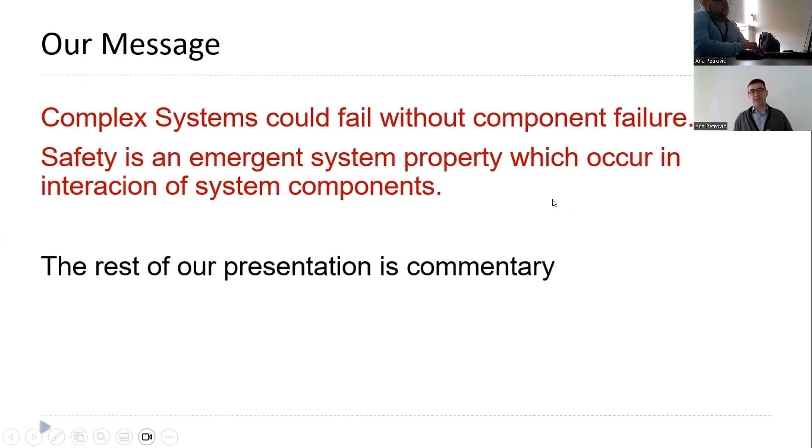So the outline of the commentary is: a few words about complex systems, then systems thinking and systems theory, risk and safety - those are different concepts - STAMP and STPA, this is methodology I will talk about, a few case studies, and epilogue.

In addition to a message, we also have a motto, which has been a leading sign in the last few years. It's actually words of our Professor Nancy Leveson from MIT. She said the first step in solving any problem is to understand it. We often propose solutions to problems that we do not understand, and then we are surprised when the solutions fail to have the anticipated effect.

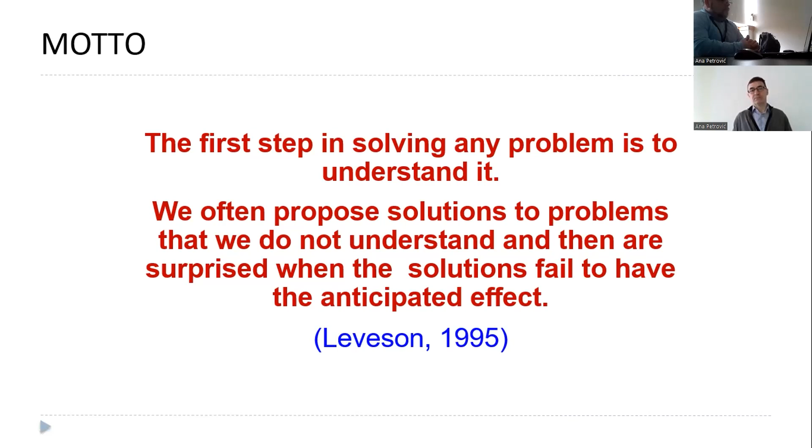We came from hydraulic engineering area, so this presentation is primarily related to that, but anyway, it should be applicable to any kind of complex systems.

We are focused on water systems, complex hydraulic engineering systems. Those systems are extremely complex. We have catchments, surface water reservoirs, many gravity mains, river channels, water treatment plants, distribution networks, etc. It's really complex. In addition to that, usually these systems are bureaucratically divided into water resource engineering and communal services. But the system is one.

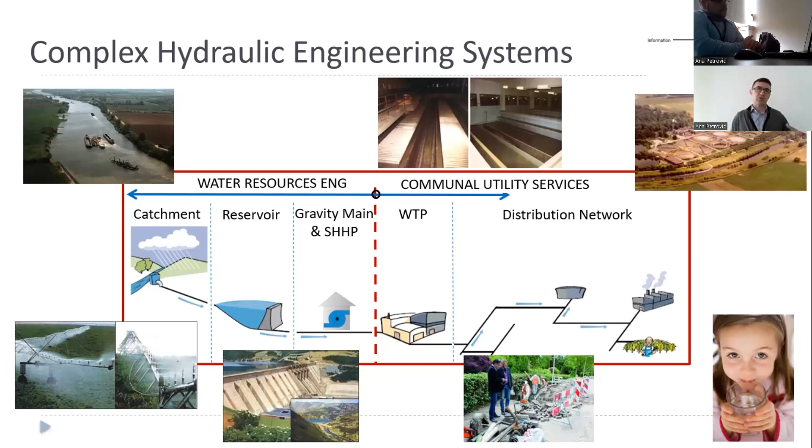Yes, and when we are trying to find the component failure, we will chase our tail. So many component failures could occur, so how can we approach that kind of complex system?

Possible approaches, for example, traditional analysis, which is based on decomposition or analytical reduction. We just split the system into parts, into components, and in that context, behavior of the components is the same, whether analyzed separately or with their role in the system in totality.

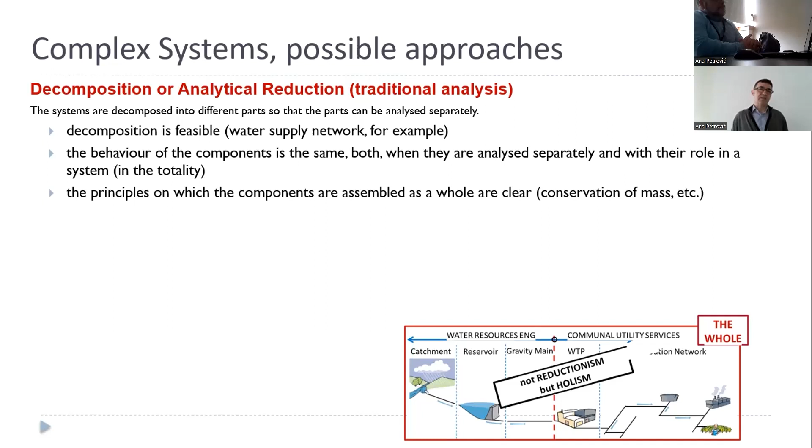This is traditional kind of analysis. Other approaches have basic ideas of systems thinking and systems theory. The analysis starts with the system as a whole, not with the parts.

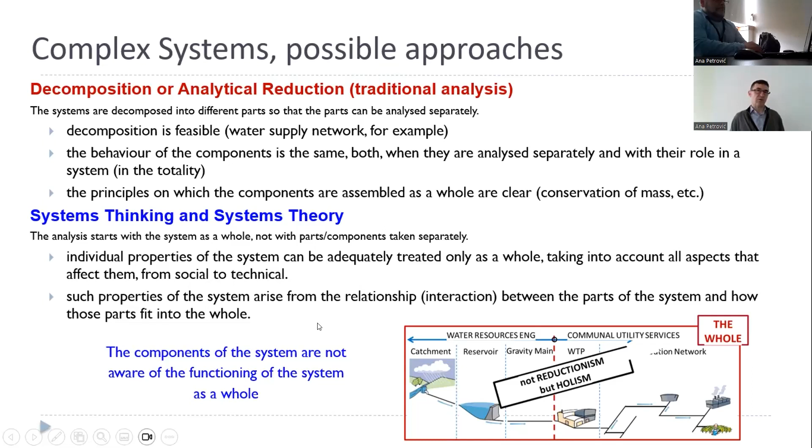Related to the previous approach, individual properties of a system can be adequately treated only as a whole, taking into account all aspects of them, from social to technical, because plenty of layers are in that kind of complex system. Such properties of the system arise from the relationships between the parts of the system and how those parts fit into the whole. So the components of the system are not aware of functioning the system as a whole.

A few words about systems thinking and system theory: water resources management systems are systems of organized complexity. They are open type, hierarchical, social, technical, require control to be adaptive, safe, and resilient.

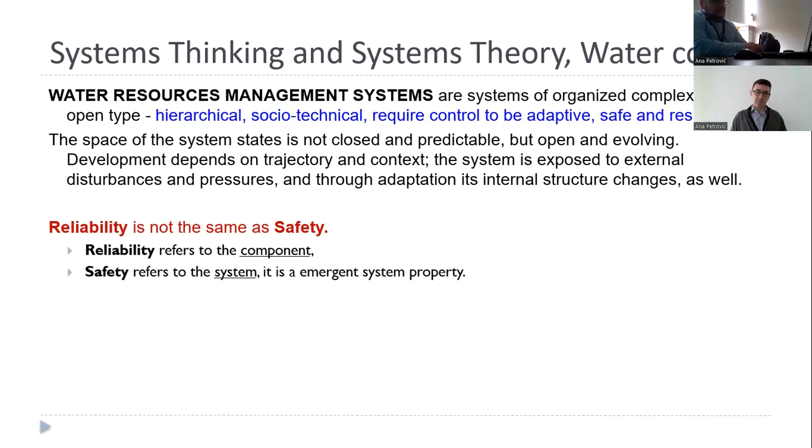It should be noted that reliability is not the same as safety. Reliability refers to the components, and safety refers to the system. Safety is the emergent system property, which is formed in the interaction of system components.

So when it comes to risk, this is a different concept. The probability is not an appropriate measure for systems of organized complexity, which water systems are, because it does not take into account several very substantial elements: errors in design, social and organizational factors, adaptation of the system over time.

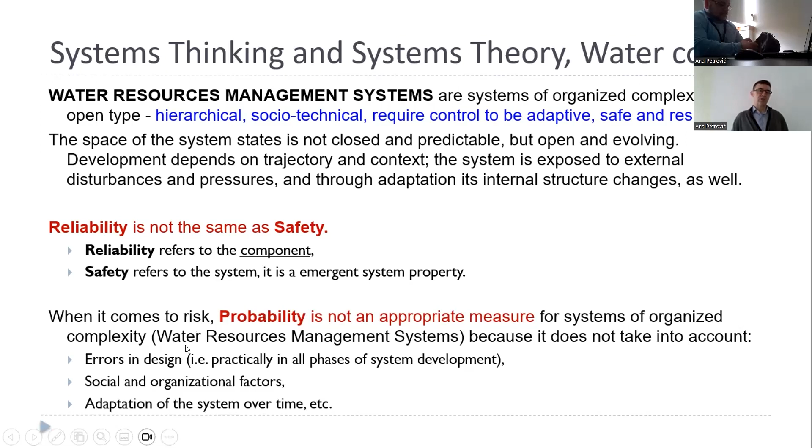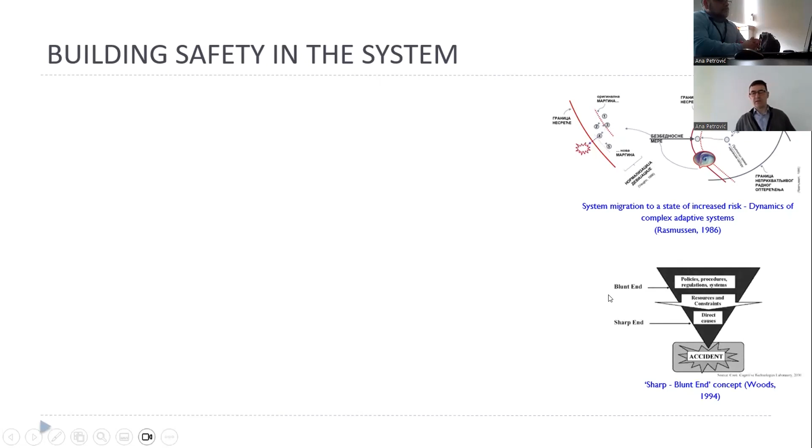So I will not elaborate on these basic approaches, but just mention Professor Rasmussen's concept of system migration to the state of increased risk for complex adaptive systems, and Professor Woods' concept of sharp end, blunt end, and just want to underline that we need to address safety as early as possible in system development through all life cycle phases.

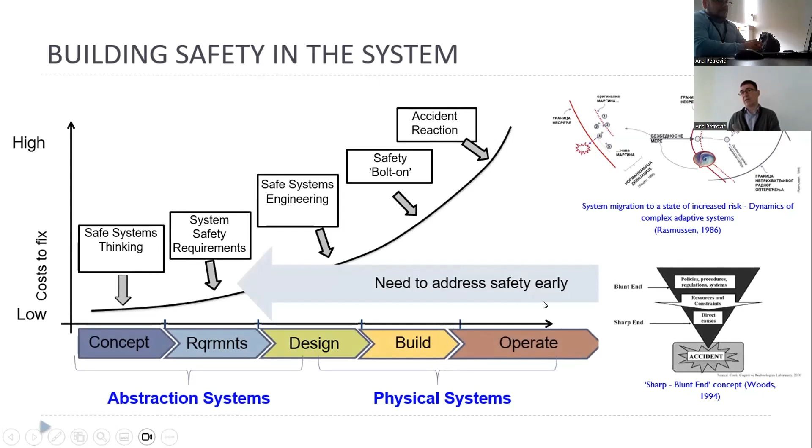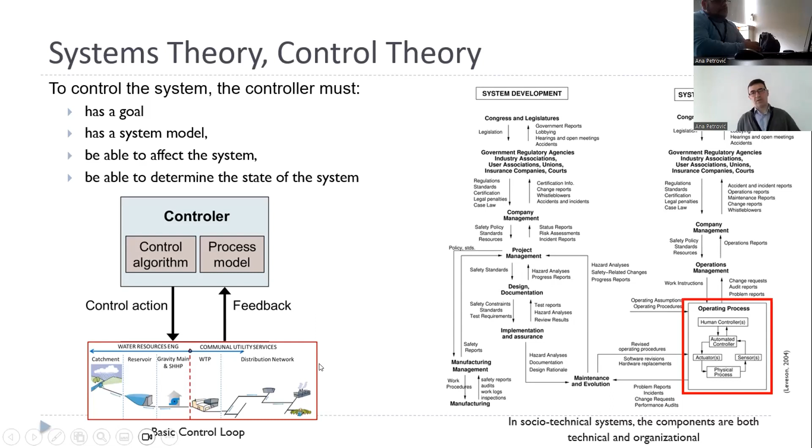All previous is the basis for the methodology of Professor Leveson. Actually, one is a concept and the other is a technique. System Theoretic Accident Model and Processes is based on the concept of systems theory, control theory, and elements of cognitive engineering. The basic concept of the method and approach is constraints, control loops, and process models, and also levels of control.

You could see that in previous slides. I will not elaborate that in detail.

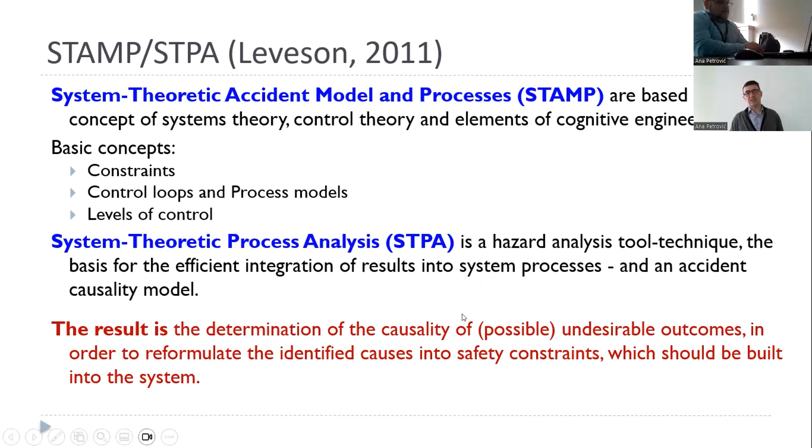And the technique which is based on this approach is System Theoretic Process Analysis, which is a hazard analysis tool and technique, basis for the efficient integration of results into system processes. Actually, it is an accident causality model. What are the results of this approach and technique? The result is determination of causality of causes of possible undesirable outcomes, in order to reformulate those identified causes into safety constraints, which should be imposed on system behavior.

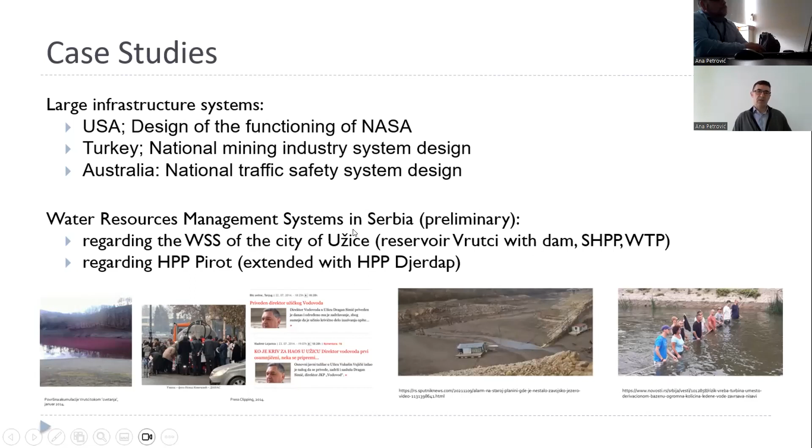A few case studies, just to show that this methodology is applied in the functioning of NASA. In Turkey, for example, when speaking about infrastructure, it is applied in national mining industry system design. In Australia, it is implemented in national traffic system safety design. But in our research, we apply that methodology in a preliminary way on the water supply system of Užice, reservoir Vrutci with dam, small hydropower plant and water treatment plant, and on hydropower plant Pirot, extended with hydropower plant Đerdap. In the next two slides, I will give some details of these two case studies.

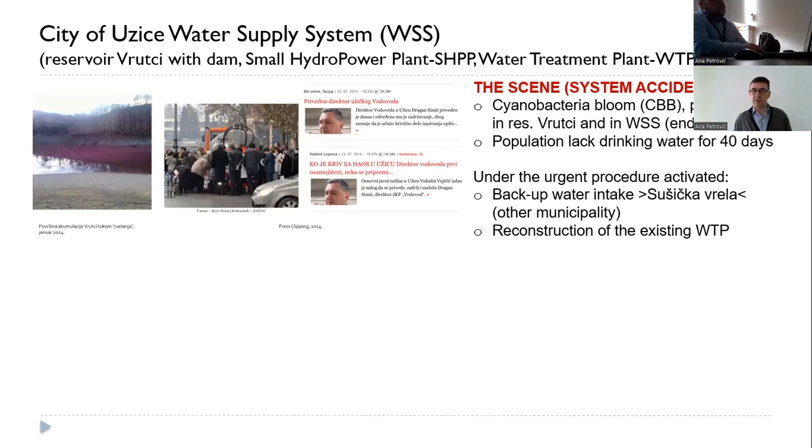City of Užice, what was the scene? About 10 years ago, the system experienced a cyanobacterial bloom, a potentially toxic bloom in the reservoir of Vrutci at the end of 2013, and the population of Užice lacked drinking water for more than 40 days. So this is a very complex system.

So a few causes are: different definitions of water source in different water regulations, and no appropriate monitoring was established at all. This is a huge result which has to be corrected by changing the law. So this is one of the causes of the accident.

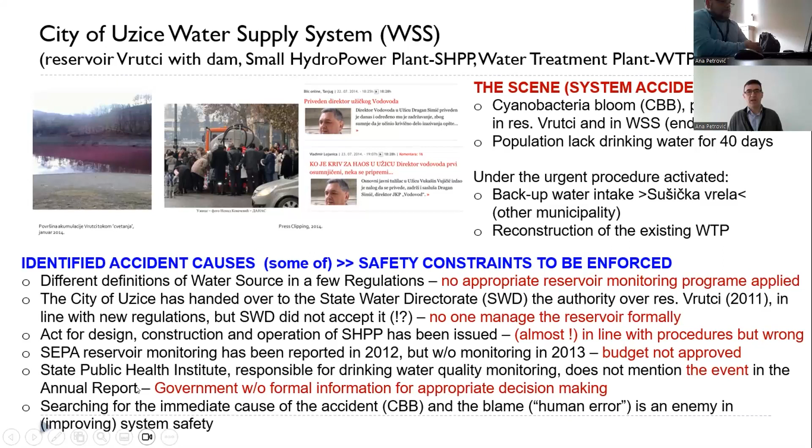The other example is hydropower plant Pirot. What is the scene of the system accident? Excessive high flows of icy water in the Nišava river caused 2 fatalities, and also devastated the river environment and created many hazards for river swimmers from hydropower plant Pirot.

We implemented the methodology on this case. It identified that unusually low levels in Zavojsko Lake are within design limits, 22 meters low level, but those levels are appropriate by design, they are above the minimum level from design. So that could be characterized as design flaw.

Scheduled annual hydropower plant production plan was already reached in April. So is there something wrong with the planning? State water inspection stated that the hydropower plant has a proper water permit for operation according to the law. So many bad things occur, but supposedly everything is okay.

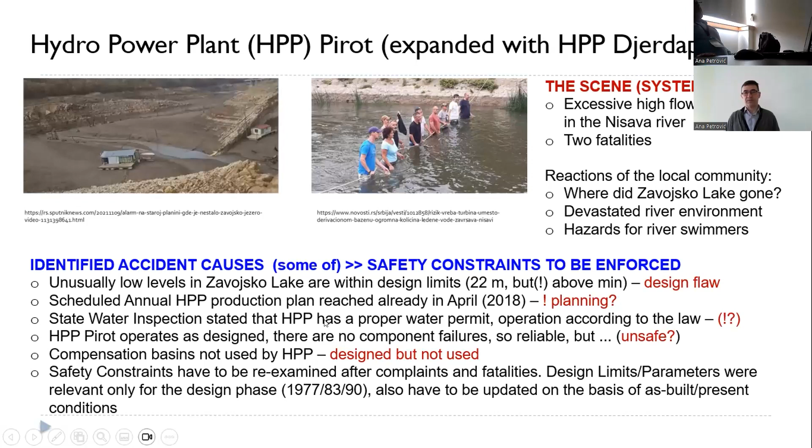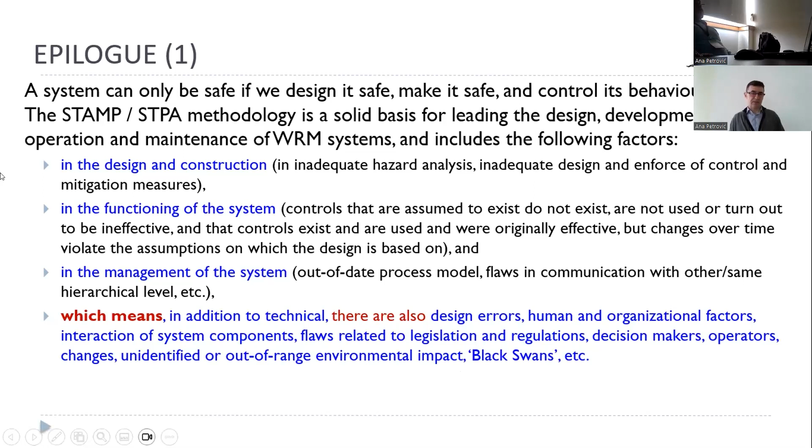So, some kind of epilogue: a system can only be safe if we design it safe, make it safe, and control its behavior. The STPA and STAMP methodology is a solid basis for leading the design, development, operation, and maintenance of complex systems, which means, in addition to technical issues, there are also design errors, human and organizational factors, interaction of system components, flaws related to legislation and regulation, decision makers, operators, changes, unidentified or out-of-range environmental impacts, black swans, etc., which would be covered by this STPA and STAMP methodology.

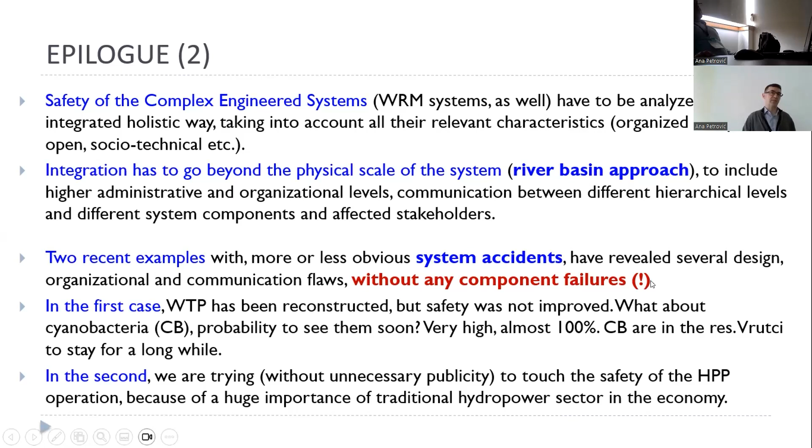The safety of complex systems has to be analyzed in an integrated, holistic way, taking into account all their relevant characteristics, not just component failure. Integration has to go beyond the physical scale of the system, for example a river basin approach, to include higher administrative and organizational levels, communication between different hierarchical levels and different system components, and affected stakeholders. So, two recent examples with more or less obvious system accidents have revealed several design, organization, and communication flaws without any component failure. This is significant: the system failed without component failures.